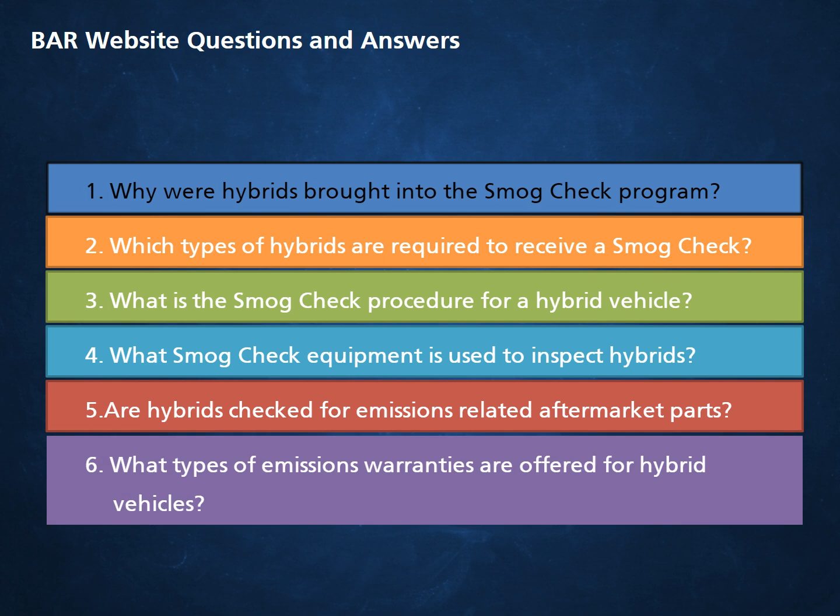Why were hybrids brought into the smog check program? Hybrids are designed to meet strict emission standards and to provide improved fuel economy over conventional vehicles. However, hybrid emission control systems experience the same causes of long-term deterioration affecting other vehicles.

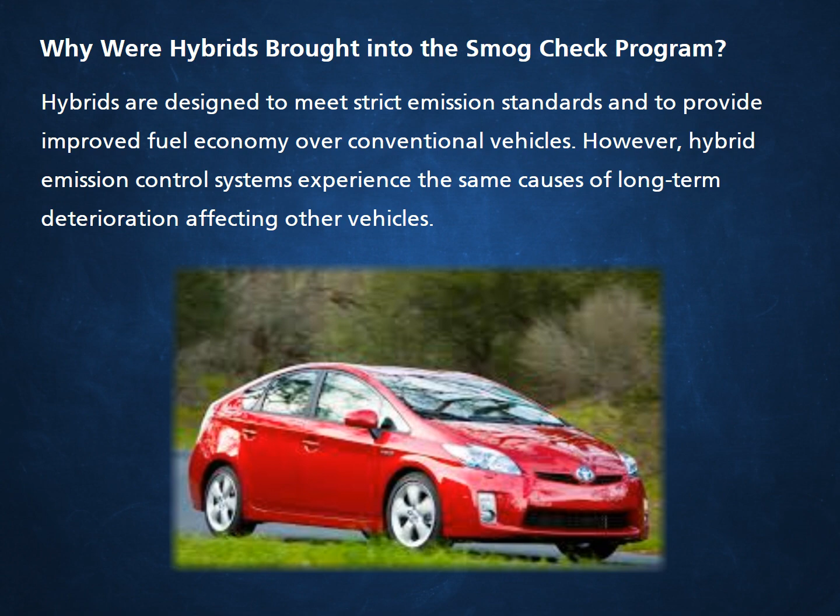Emission control system malfunctions on hybrids can cause emissions to sharply increase. By ensuring that hybrid emission-related problems are identified and then properly repaired, emission levels will remain low over the life of the vehicle.

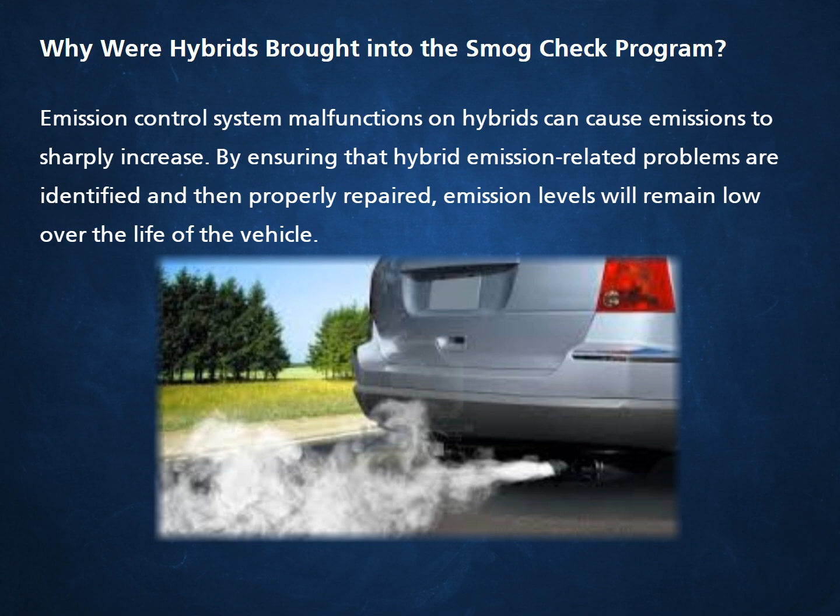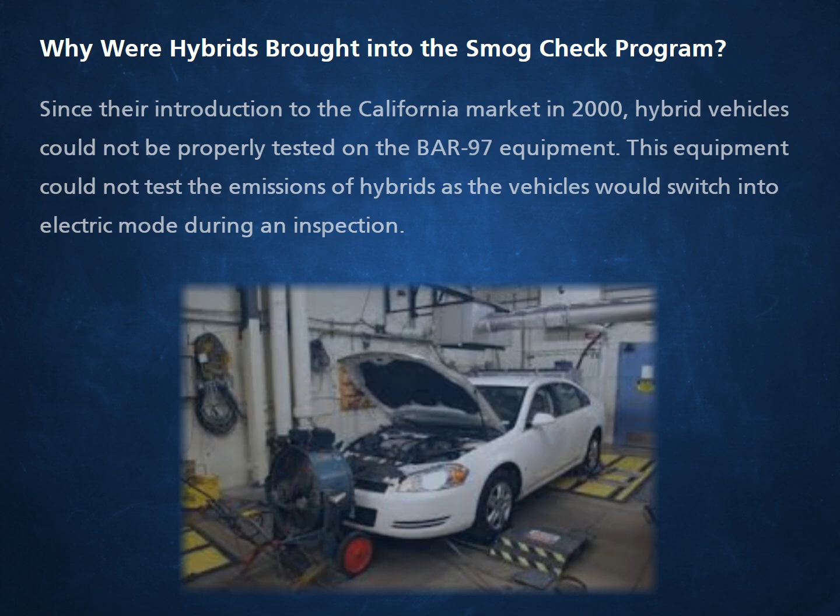Since their introduction to the California market in 2000, hybrid vehicles could not be properly tested on the BAR-97 equipment. This equipment could not test the emissions of hybrids as the vehicles will switch into electric mode during an inspection. The Bureau of Automotive Repair's Onboard Diagnostic Inspection System, BAR OIS, which is based on a visual inspection of emission control components and a scan of the vehicle's onboard diagnostic system, has resolved this testing issue.

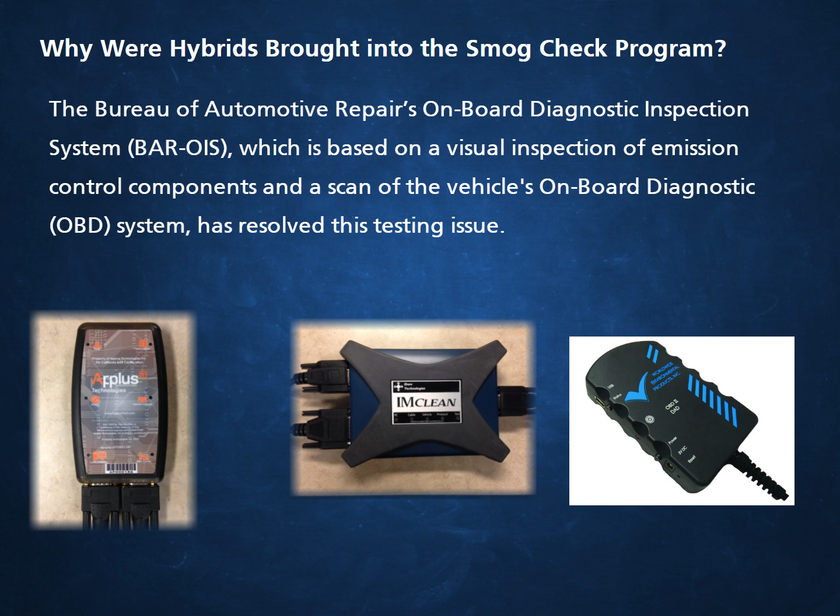Which type of hybrid vehicles are required to receive a smog check? All hybrid vehicles will be subject to a smog check. Just like traditional gasoline-powered vehicles, hybrid vehicles 8 model years and newer are exempt from the biennial smog check requirement. Hybrid vehicles 4 model years and newer are also exempt from the change of ownership smog check requirement.

For more information, refer to BAR's Smog Check Requirements by Vehicle Type table located in the Smog Check Reference Guide.

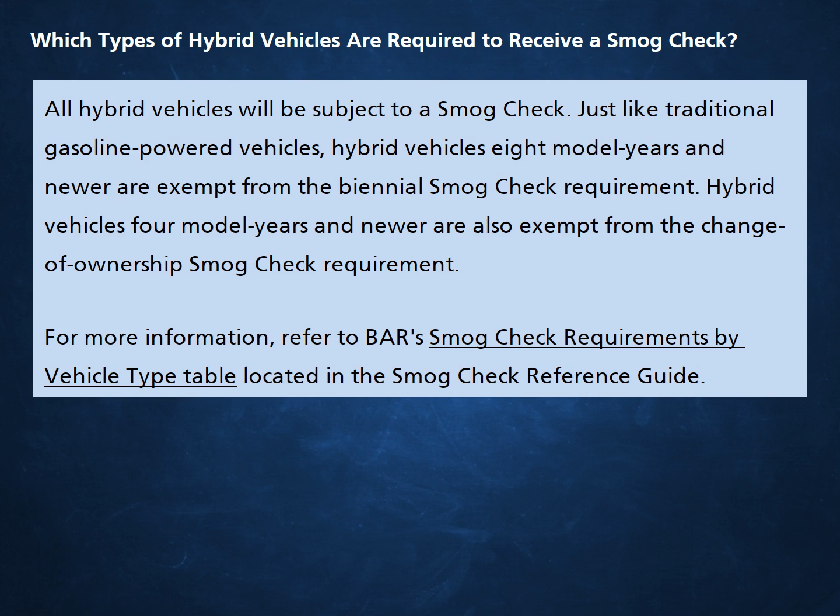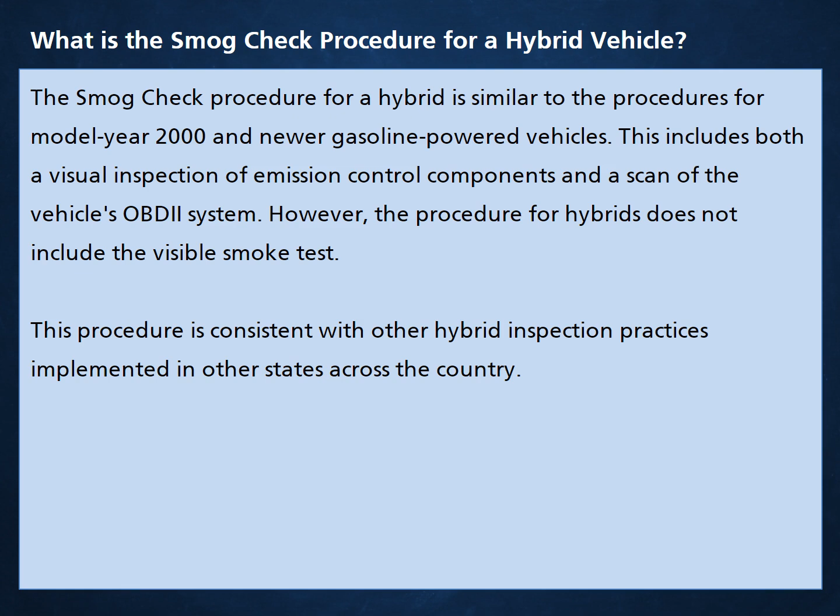What is the smog check procedure for a hybrid vehicle? The smog check procedure for a hybrid is similar to the procedures for model year 2000 and newer gasoline-powered vehicles. This includes both a visual inspection of emission control components and a scan of the vehicle's OBD2 system. However, the procedure for hybrids does not include the visible smoke test. This procedure is consistent with other hybrid inspection practices implemented in other states across the country.

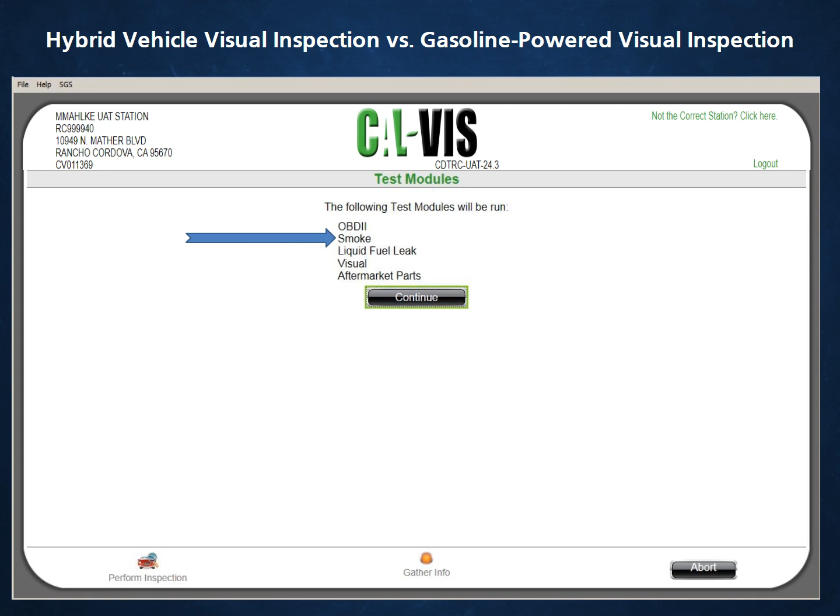What smog check equipment is used to inspect hybrid vehicles? Hybrids can only be inspected using the Bureau of Automotive Repair's OBD inspection system, BAR OIS, since the BAR OIS is the only equipment compatible for testing hybrid vehicles in California.

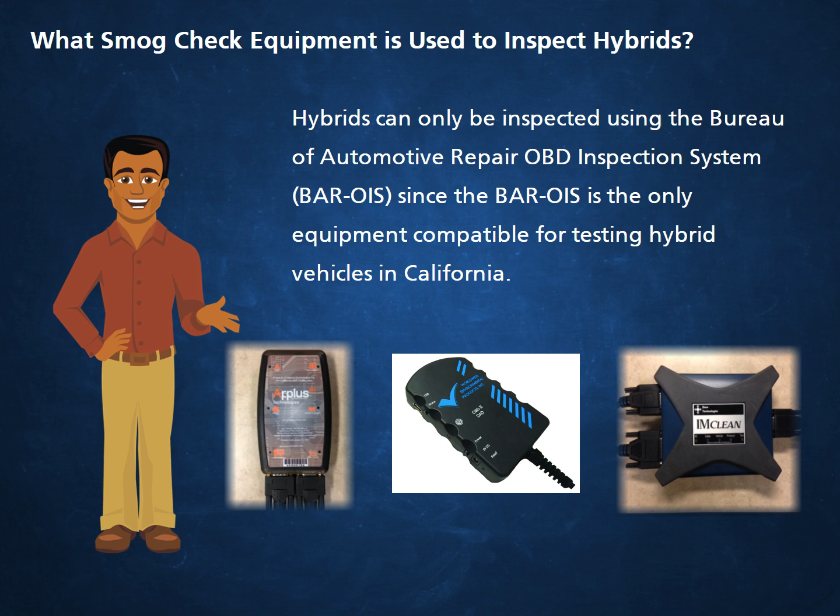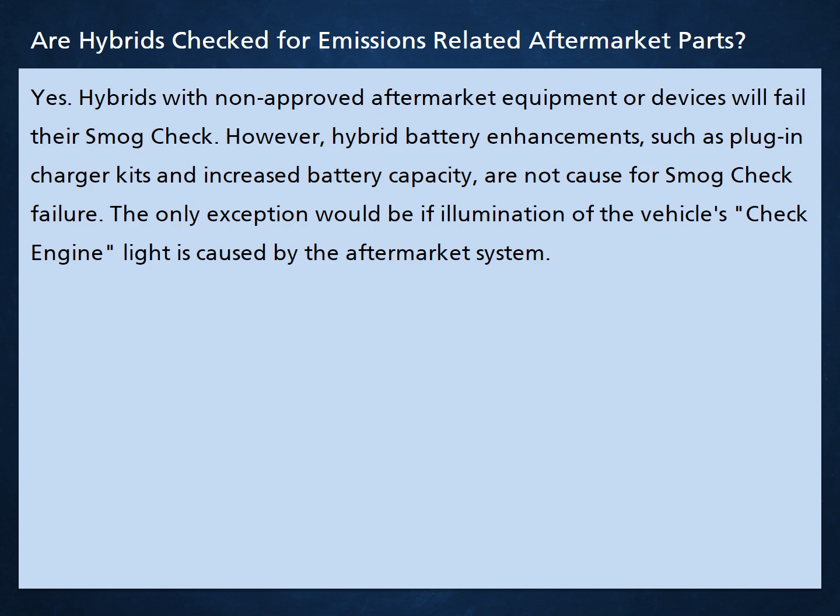Are hybrids checked for emission-related aftermarket parts? Yes. Hybrids with non-approved aftermarket equipment or devices will fail their smog check. However, hybrid battery enhancements, such as plug-in charger kits and increased battery capacity, are not cause for smog check failure. The only exception would be if illumination of the vehicle's check engine light is caused by the aftermarket system. For more information on aftermarket parts, refer to the Smog Check Reference Guide or the California Air Resources Board (CARB) Aftermarket Parts Database.

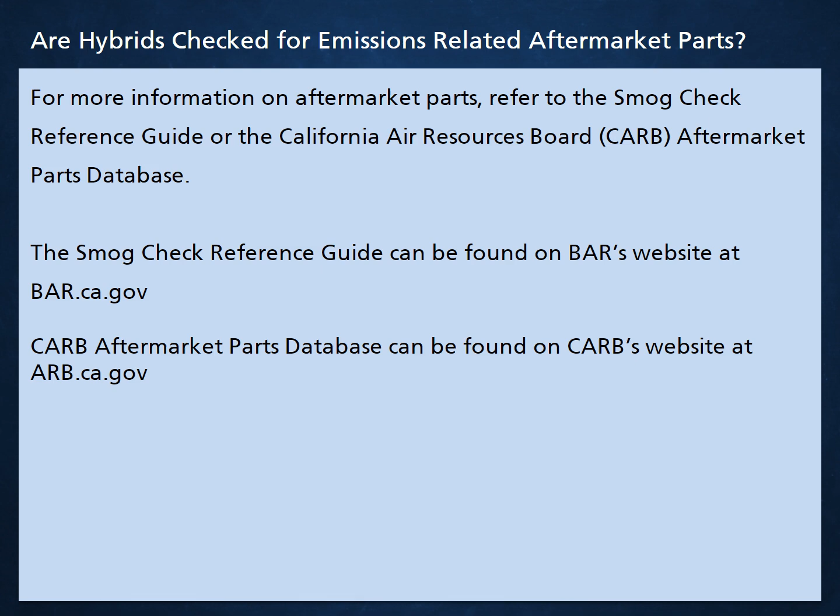What type of emission warranties are offered for hybrid vehicles? Hybrid emission warranties vary by vehicle manufacturer and model.

Many 2005 and newer model year hybrids are certified to the California Partial Zero Emission Vehicle, or PZEV, standard. The PZEV standard requires an emission system warranty of 15 years or 150,000 miles and a battery warranty of 10 years or 150,000 miles. Model year 2004 and older hybrids typically have the same emission warranties as traditional gasoline-powered vehicles.

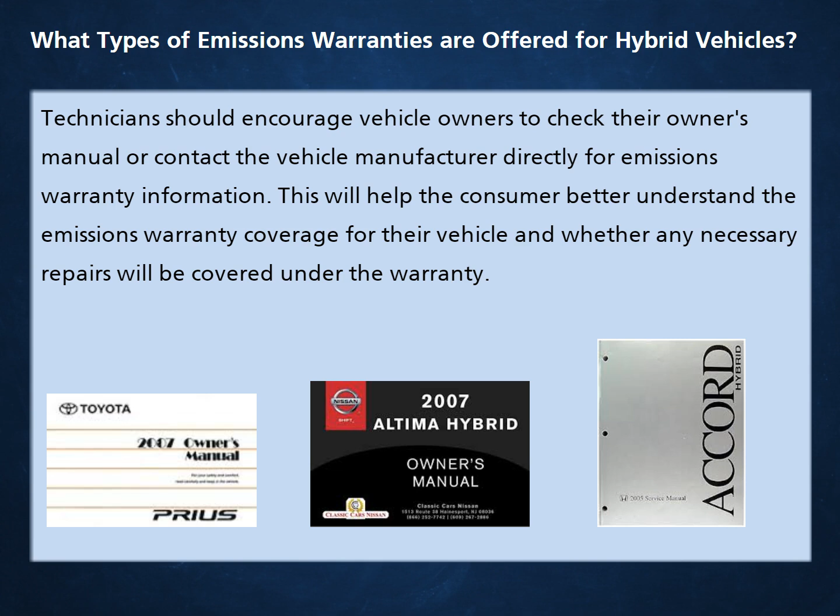Technicians should encourage vehicle owners to check their owner's manual or contact the vehicle manufacturer directly for emission warranty information. This will help the consumer better understand the emissions warranty coverage for the vehicle and whether any necessary repairs will be covered under the warranty.

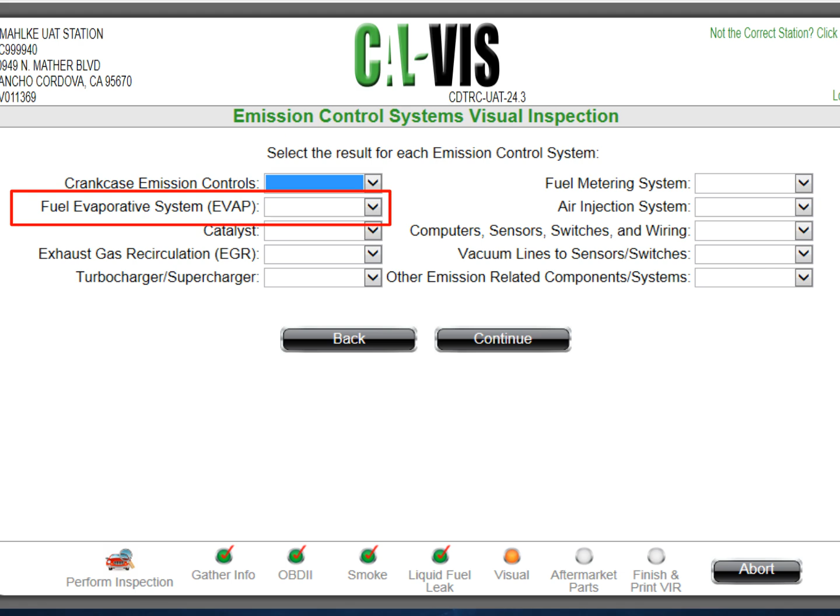Here's the OIS visual inspection screen, and it lists the following components or systems for the visual inspection: crankcase emission controls, fuel evaporative system, catalyst, exhaust gas recirculation, turbocharger supercharger, fuel metering system, air injection system, computers, sensors, switches, and wiring, vacuum lines to sensors and switches, and finally, other emission-related component systems.

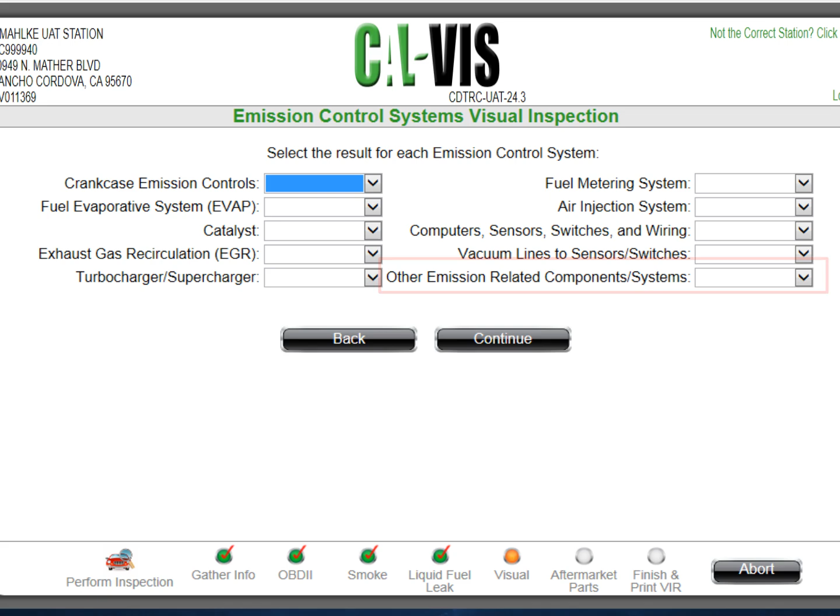As with the OIS visual inspection, there are 4 entry options for each of the categories, which are P for pass, F for defective, NA for not applicable, and T for tamper.

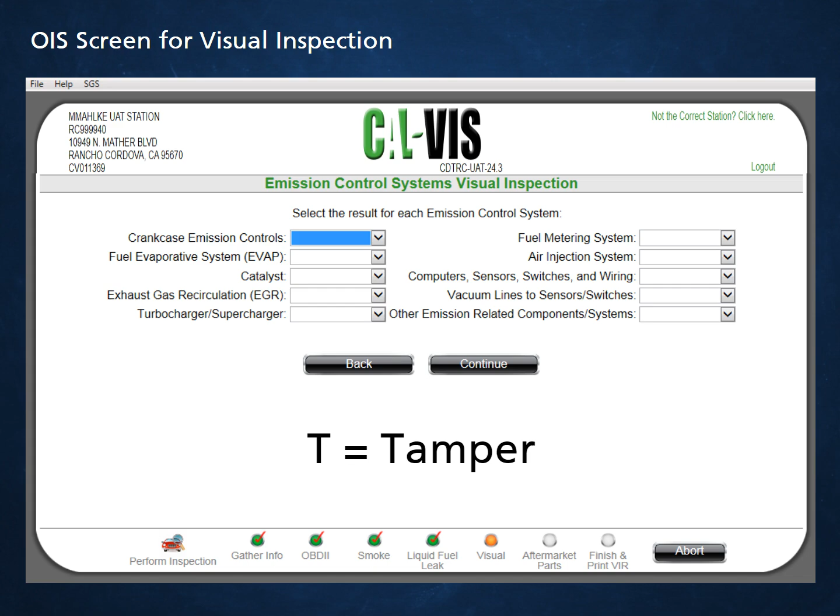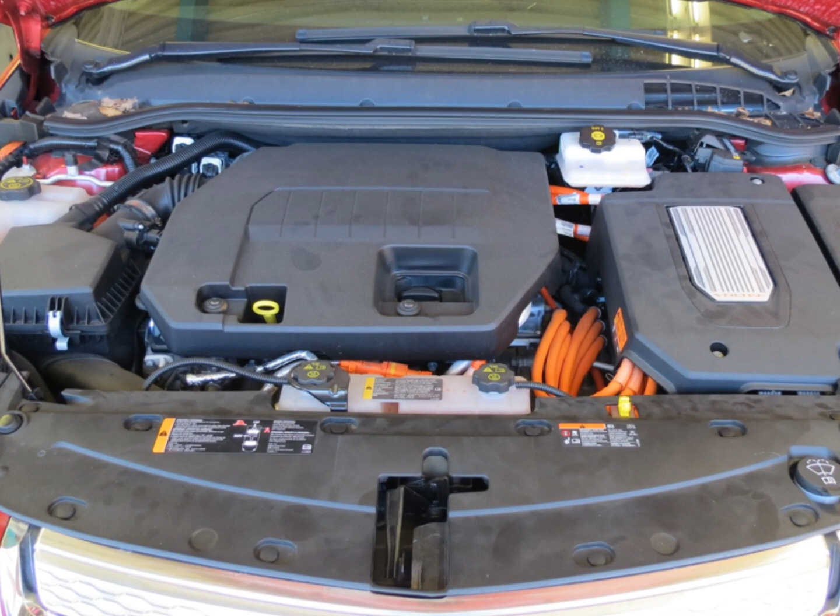The first vehicle we're looking at is a 2013 Chevy Volt. We need to locate the PCV valve. Here's a view of the engine compartment, but no PCV valve is visible, so it appears that we will need to lift the engine cover. This requires that we remove the 2 screws as circled in red.

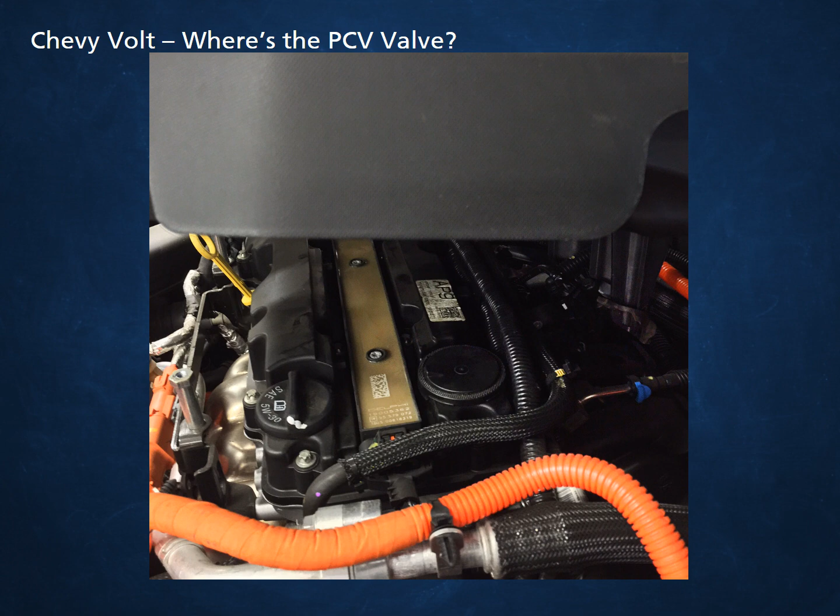Now we've lifted the engine cover. So where's the PCV valve? Although it's in plain view, it does not appear to be your normal PCV valve. It's right on top of the valve cover, as indicated by the red circle, and is part of the valve cover assembly.

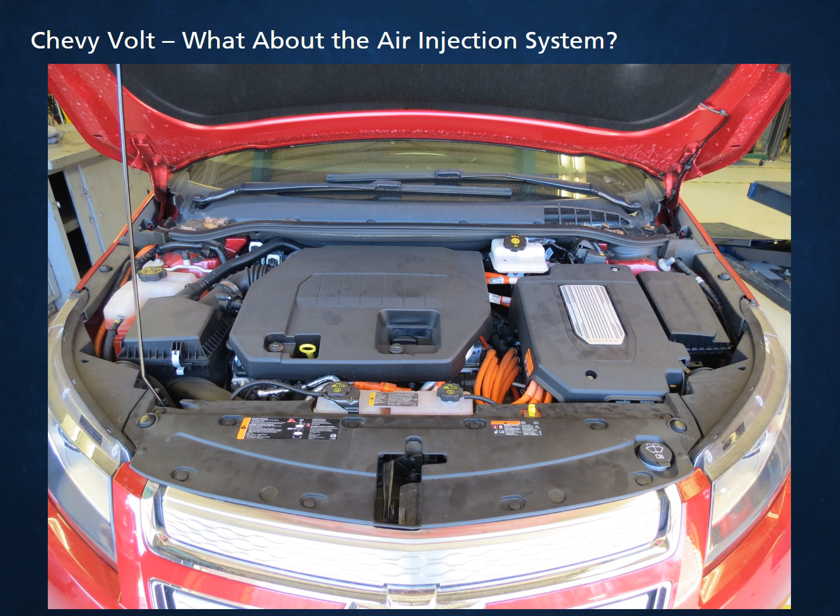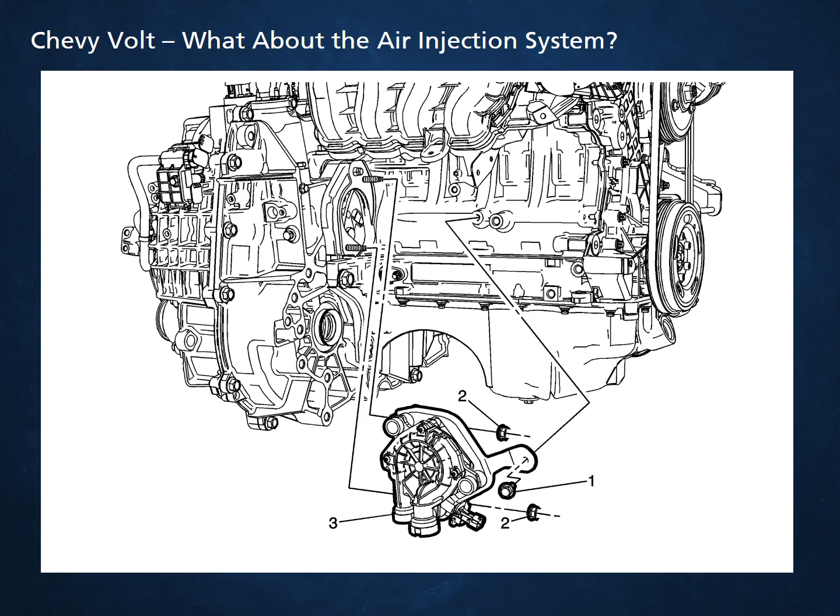What about the fuel evaporative canister? Like many newer model year vehicles, the evaporative canister is located underneath the vehicle by the gas tank, as shown in this illustration.

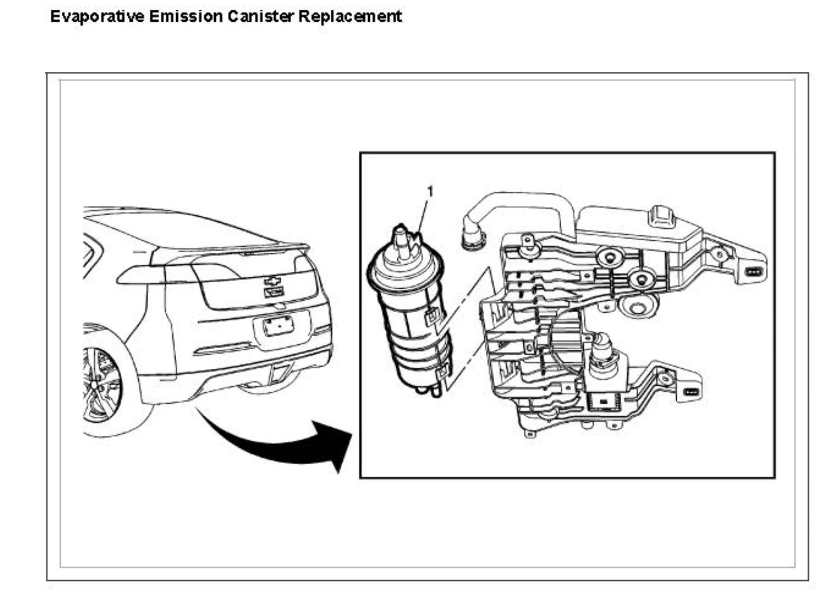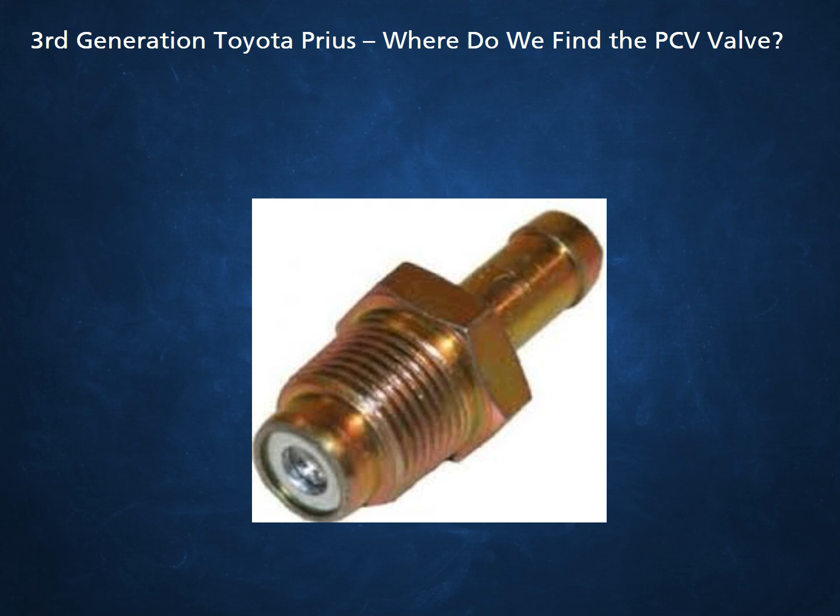We looked at the PCV valve on the Chevy Volt, and although it's significantly different from most vehicles, the Gen 3 Prius has a typical PCV valve. Unfortunately, it's in a location that's difficult - it is completely covered by the air cleaner. We'll zoom in underneath the air cleaner to show you the valve. Here you can see the PCV hose connected to the PCV valve.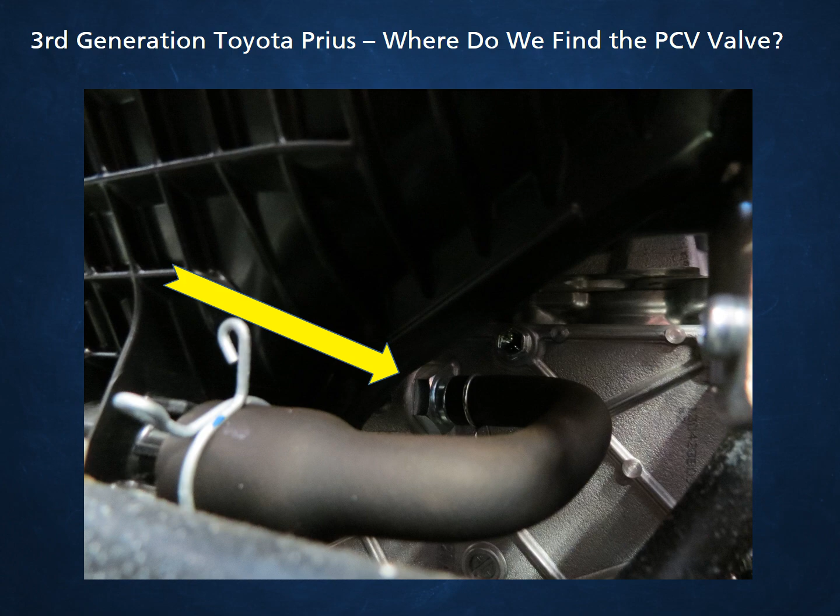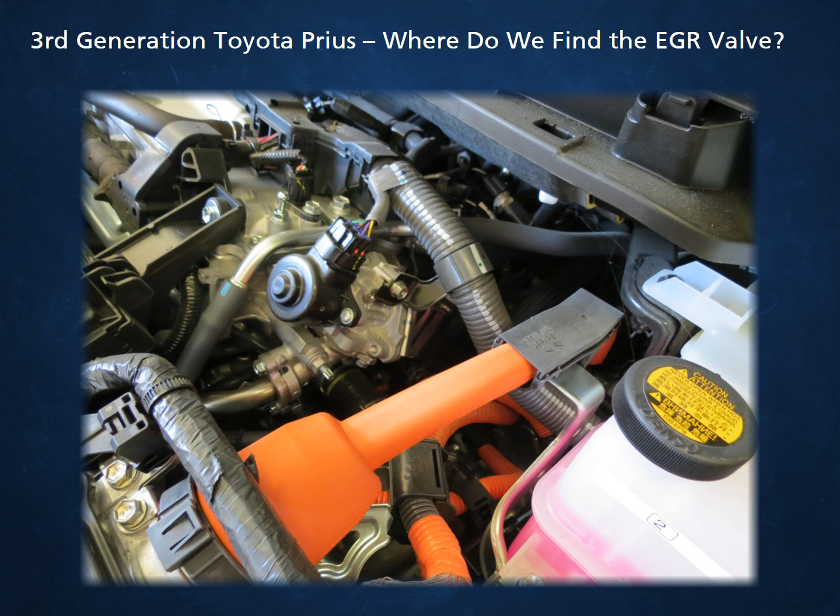What about locating the EGR valve on a Gen 3 Prius? This one is much easier because we don't have to remove anything to see the component. The EGR valve is on the left side of the cylinder head. Let's zoom in from the side for a better look at the valve. As you can see, this is electronically controlled.

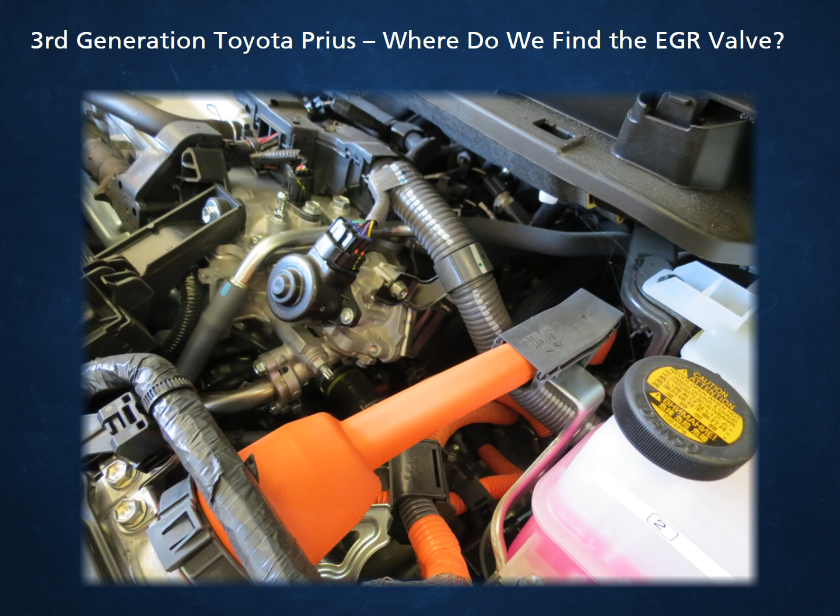It also contains an EGR cooler that is part and parcel of the EGR valve system. In other words, it must be complete. If the vehicle has an EGR cooler that's been tampered with, then the vehicle fails the visual inspection.

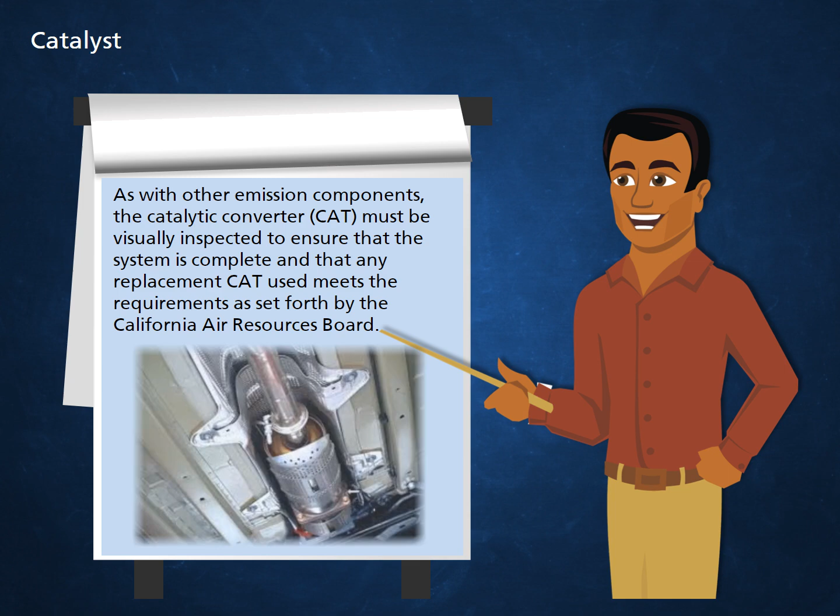As with other emission components, the catalytic converter must be visually inspected to ensure that the system is complete and that any replacement cat used meets the requirements as set forth by the California Air Resources Board.

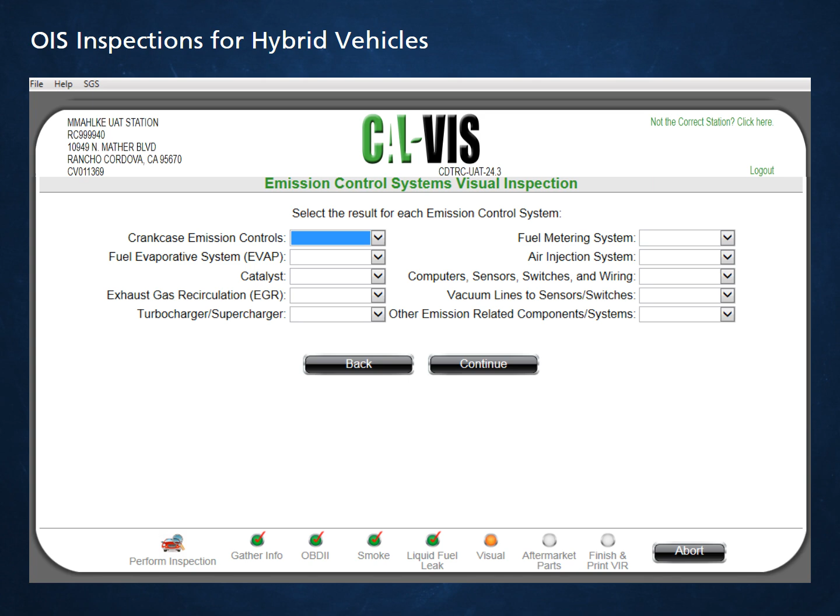The purpose of this portion of the presentation has been to familiarize you with some of the issues regarding hybrid inspections. As always, if you need additional information, don't hesitate to review any of the following information sources: vehicle manufacturer service manuals, industry standard reference manuals, or periodicals published by nationally recognized repair information providers.

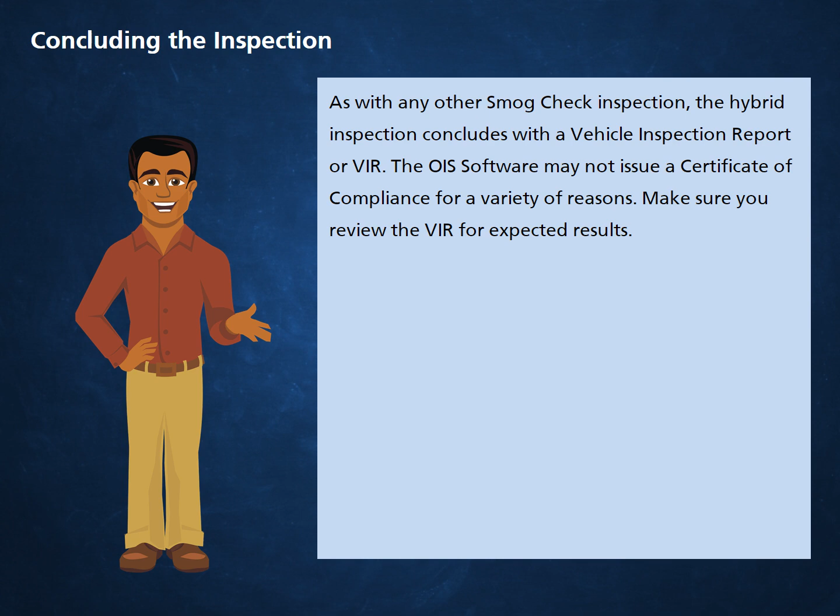As with any other smog check inspection, the hybrid inspection concludes with a vehicle inspection report, or VIR. The OIS software may not issue a certificate of compliance for a variety of reasons. Make sure you review the VIR for expected results.

Most car manufacturers have developed a variety of hybrid vehicles for the automotive marketplace. As the complexity and voltage of these vehicles increases, it is incumbent upon the technician to remain abreast of the technology as it pertains to the related hazards and how to avoid injury.

It's always advisable to wear eye protection when inspecting or servicing vehicles. However, insulated gloves are also needed if you will be servicing a hybrid.

When discussing electrical safety gloves, there are 3 rules to remember, which are as follows. Electrical safety gloves used to service hybrid vehicles should meet Class 0 standards as identified by the Occupational Safety and Health Administration, OSHA. In order to maintain the highest level of insulating protection and ensure long life, it is essential that electrical safety gloves are properly cared for and stored.

Before each use, gloves should be inspected for holes, rips, tears, or signs of chemical deterioration.